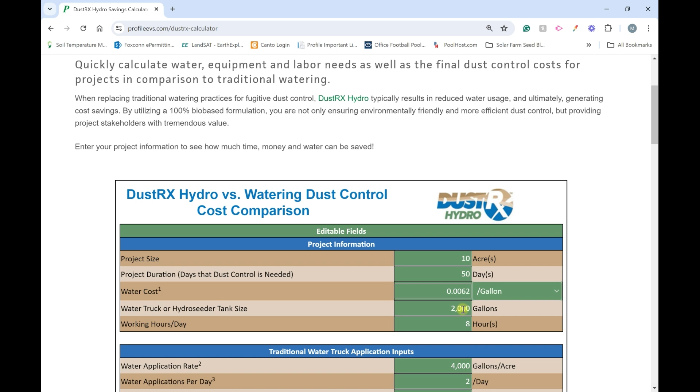Your water truck or hydroseeding tank size, 2,000 gallons, is a pretty common value. And then how many working hours are in your given day. So again, you can edit all of these fields as necessary. Next, we get into the costs associated with traditional water truck applications for dust control. Now, the most common application rate that we've seen across the United States is about 4,000 gallons per acre to effectively manage dust in arid conditions.

If you are in an arid environment or during a drought, you may have to increase the number of applications needed per day. So typically, we see anywhere from 1 to 3 applications per day. So right in the middle of that is 2 applications per day. And then the time required to empty and refill your tank, let's leave it at 1 hour. Just these nice round integers are always better to work with. We have an equipment and labor cost associated with these applications as well. So one number we saw time and time again is about $250 per hour being billed.

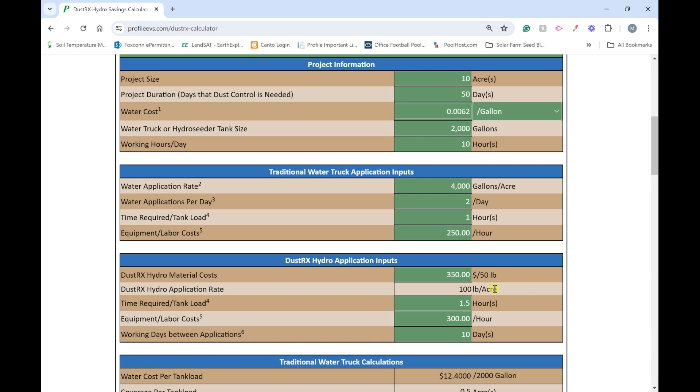Next, the DustRX Hydro application inputs. So what is the material cost? Enter that in the first line. The application rate is standard. It is 100 pounds per acre of DustRX Hydro, and that mixes with 2,000 gallons of water for application. The time required for your tank load. So you obviously have to mix this material into that tank. So we added about a half hour here, likely overkill, but nonetheless, you can adjust that time as you learn more and become more familiar with the product. Equipment and labor costs. If you have an extra hand to load that tank, we bumped that up from $250 to about $300 per hour.

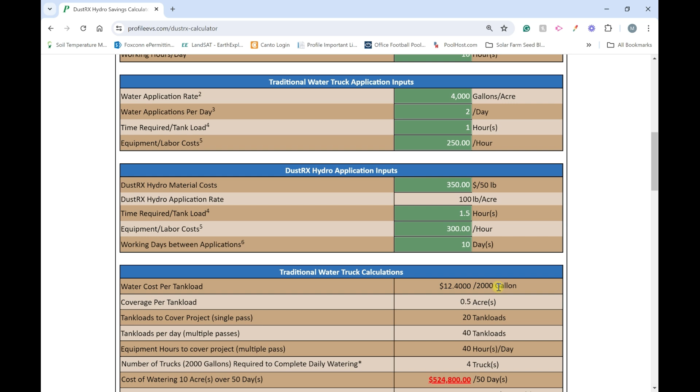Working days between applications. So think of functional longevity here. How long is this material going to last on your site without needing a secondary application of it? If you have a trafficked area with heavy equipment, big machinery moving across your site, about 10 days, 5 days, and again, dependent on your area, it may vary a little bit, but nonetheless, 10 days is a nice starting point to work with when budgeting this type of solution.

Next, traditional water truck calculations. So we entered in all our variables. Now we get to dive into the results. So cost of water per tank load, coverage per tank load, total tank loads needed to cover your project in a single pass. Remember, we entered 2 passes per day for this specific project with traditional watering techniques. So 40 total tank loads per day needed to control your dust on this site. That would equate to about 40 man hours and equipment hours per day. So you would need a total of 4 trucks to complete those watering applications in a given day.

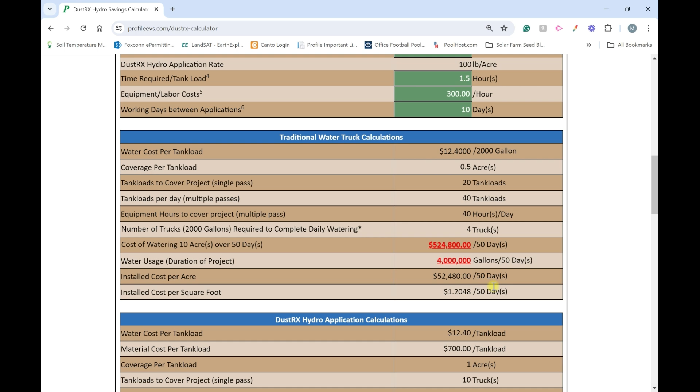So that gives you your cost of watering those 10 acres over the 50-day period. It also gives you your water usage for the duration of the project. And then we broke those down into installed cost per acre and installed cost per square foot as well. Next, the results for the DustRX Hydro application. Same water cost per tank load, but we did add a row for material cost per tank load. Coverage per tank load, very similar, right? But double because we're applying half the amount of water to the site at 2,000 gallons per acre with DustRX Hydro. So you would need 10 trucks to cover that project in a single pass.

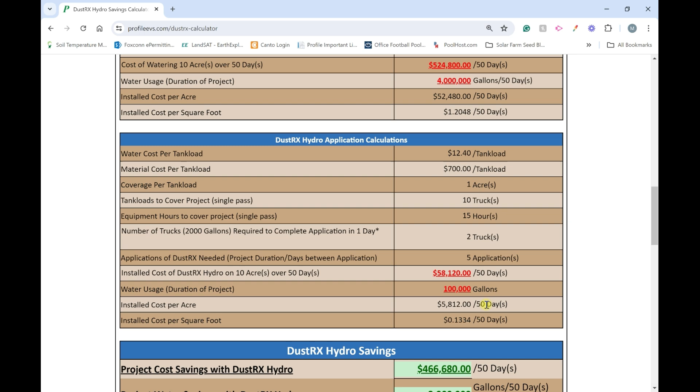The equipment hours needed to cover that project would be about 15 hours. So with that, we would need about 2 trucks to make that application in a single day. Now that's if we do not have the capabilities of treating one area and then moving on to the next the following day. Applications of DustRX needed, 5 applications, right? 50-day period, 10-day functional longevity on the product. That leads you to your installed cost of DustRX Hydro over the project time frame, your water usage for that time frame, and then again installed cost per acre and installed cost per square foot.

Now we get to the savings, right? So the monetary savings over that 50-day period would be about $466,000, right? So a tremendous amount of money saved. Even to add another layer to it, how much water would be saved? 3.9 million gallons of water could be saved on this project by using a dust control alternative to traditional watering techniques, such as DustRX Hydro. Project tank loads eliminated with DustRX Hydro, so 1,950 trucks eliminated over a 50-day time frame. Now that's a lot of equipment moving on your site. That's a lot of emissions reduced, so many benefits to that.

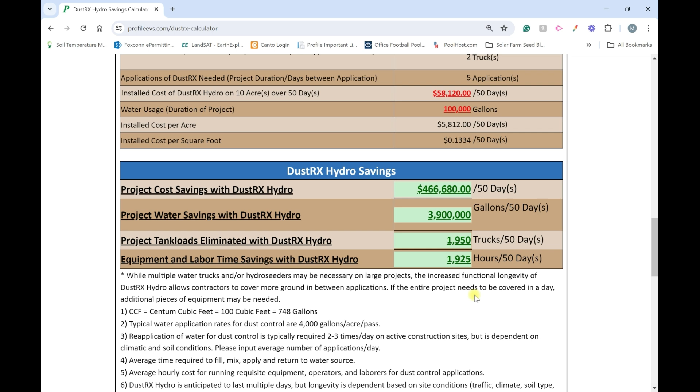And then equipment and labor time savings with DustRX Hydro. So 1,925 hours of labor and equipment time saved on that project. We have a lot of different footnotes here at the bottom, some assumptions made, but nonetheless a very conservative estimate here. With that, once you get to this point, you can either print off your project as a PDF or to a printer near you, and then ultimately you can reset the page to get back to those input values that are standard.